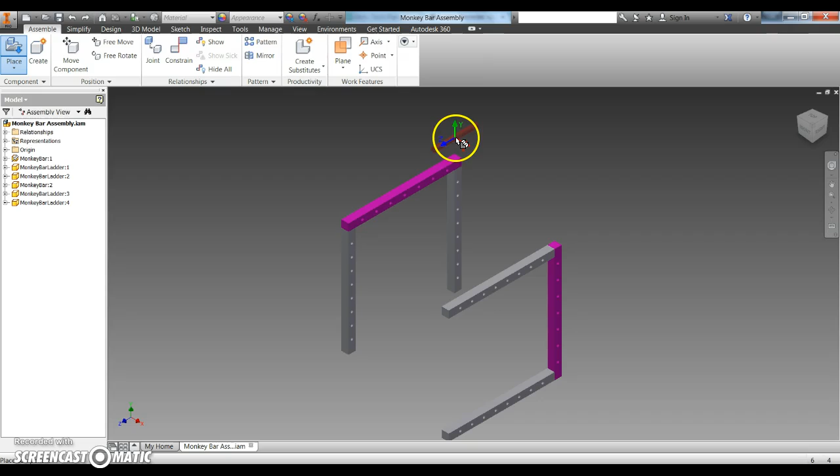You're going to need several of them, and you can go back and place more monkey bar poles if you need to. I'm just going to place a few of them in approximate locations of where they might go. You're going to have one monkey pole for every hole on your assembly.

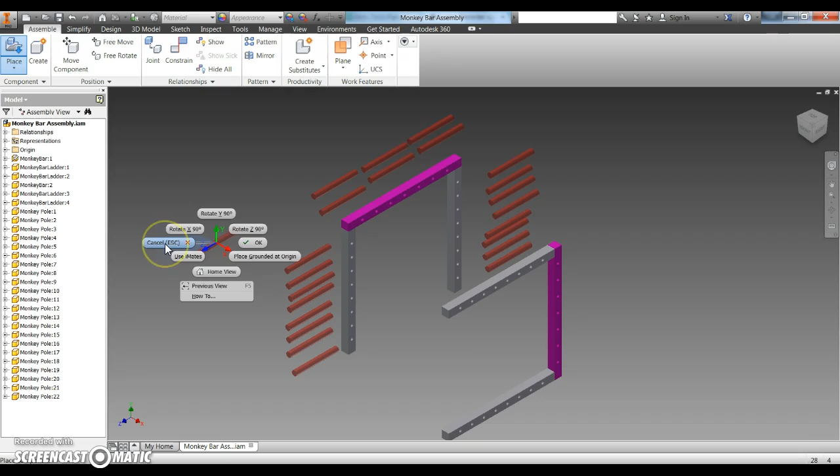Once you've got several of them placed, now we're ready to constrain them. You can right-click and click Escape. Use Constraint, and we're going to use the Insert constraint. So the type will be Insert. The solution will be aligned.

You'll select on one end of our monkey pole. Please pay attention to what direction the arrow goes, because when we insert it, we're going to want it to go in the exact same direction when we insert it into the other hole. So here, my arrow is pointing in the opposite direction. I want it to point this way. I'll click one time, and you'll notice now that monkey pole is on the inside. Select Apply.

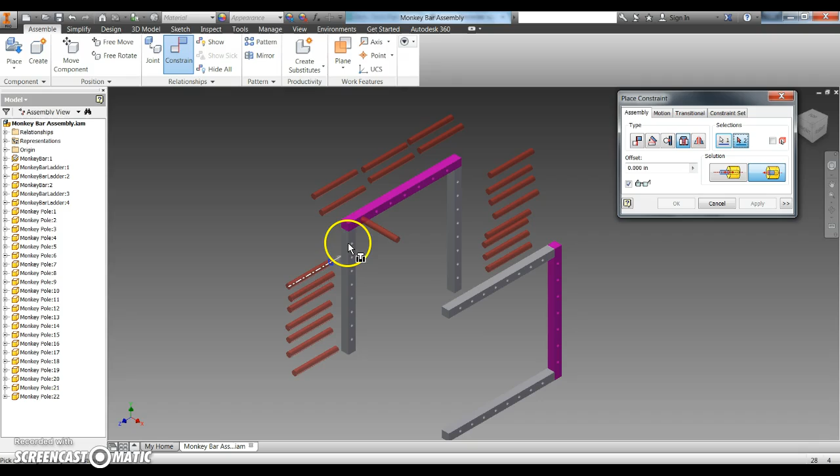You're going to continue to do that with each of the monkey poles, and then Apply. Select the end of a monkey pole. Make sure the arrows are going in the same direction, and then click Apply. Again, select one end of our monkey pole, and then select a hole and make sure the arrows are going the same direction. Please repeat that for all of the monkey poles and do all of the holes on one side of our monkey assembly.

I'm going to pause the video, continue it without recording, and then I'll show you how to attach the other side of the monkey bar assembly.

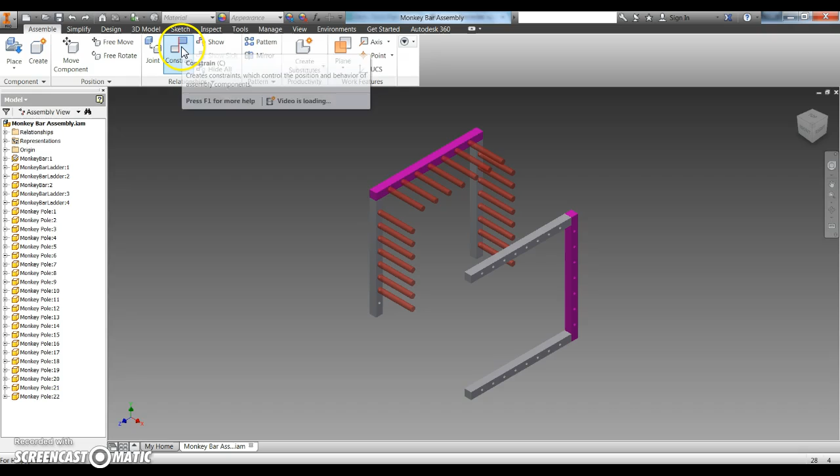Now, before we move on to attaching the other side of the monkey bars, I do want to show you another mistake that you might make after you've gone to Insert and then Aligned. One mistake you might make is by accidentally having the arrows point towards each other and the bar going on the opposite side. If this happens, just simply click Undo and then try it again by coming back up to Constrain, Insert, then Aligned.

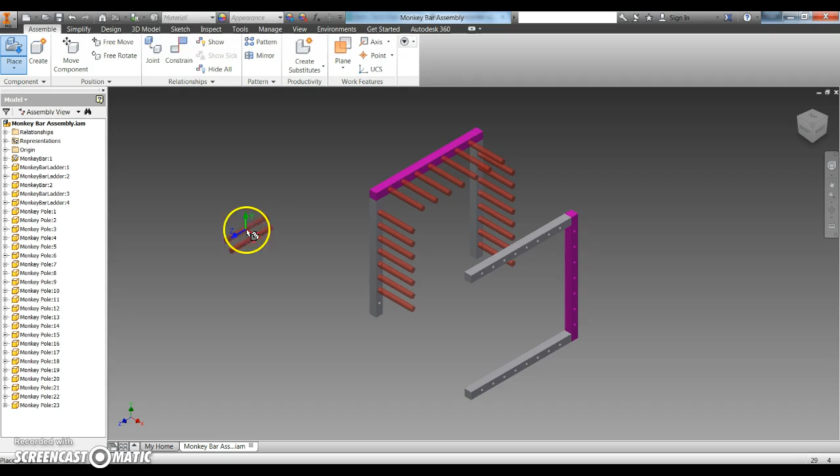Now make sure you have your other monkey pole there. I forgot to place mine again. So I'll place my monkey pole. Then I'll constrain it, making sure that those arrows are pointing in the same direction. Again, if they're not, just click Undo and replace a pole if you have to, and then click Apply.

Now, as much work as that was, this other side won't be all that difficult. We'll only have to do a couple of them to get it lined up exactly where it needs to be. We're still going to use the Insert constraint, Aligned.

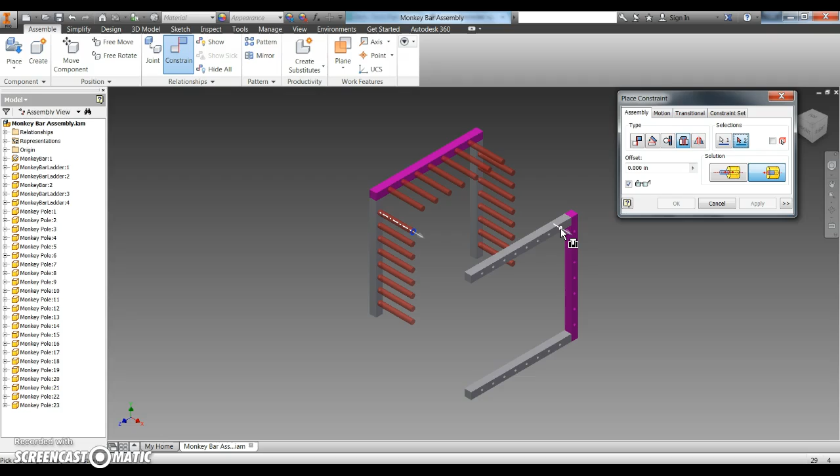We're going to select one of the monkey poles on a leg. I'm going to select the top one so it'll be easy to find the correct hole. And then I'll come over and on the opposite end, make sure that my arrows are pointing in the same direction, in the same hole. So here I chose the one at the very top of the leg. I'll click on the one at the very top, making sure my arrows are going in the same direction. You'll see that it moves it over.

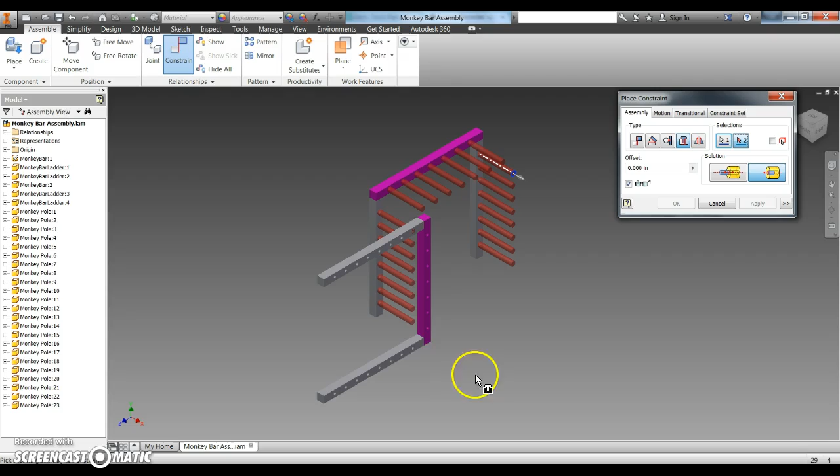To line the rest of them up, we only have to do another one on the opposite side. We'll click Apply. And then we'll select the top monkey pole on the opposite leg. Again, the top hole on the monkey leg for the opposite side. Click and Apply. You'll notice that since all of the holes line up, the monkey poles will end up being lined up into the ladder.

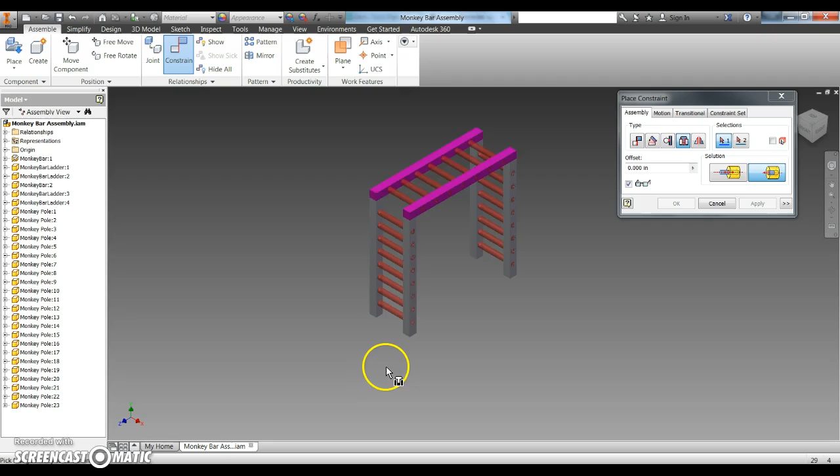You now need to save this monkey bar assembly and move on to the next assembly.